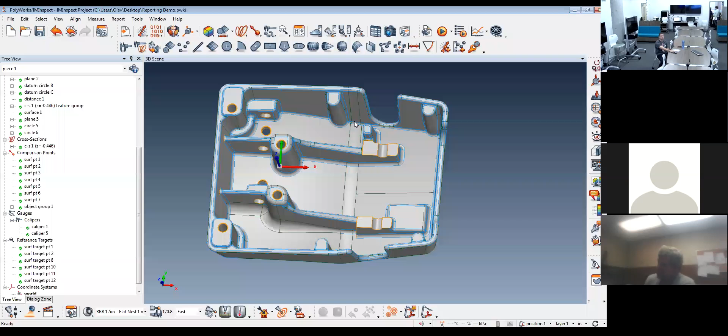Metrology. Today we're going to be going over how to report things in IMInspect. This basic part here is a casting that we have scanned in. I brought in my CAD model, and I have some data here from scanning. This is kind of a general inspection for casting.

I'm going to go through how to report it for casting purposes, like as if you're going to set it up for machining, and then as well as we'll go through some datum reference frame measurements. So generally the first thing you're going to do is you're going to bring your scan and get aligned, and you're going to create all these features.

So I have here, I created a color map on it. I'm going to turn on my color map. Usually with a color map you'll have some annotations in here showing some of the bad spots on the part that you want to highlight. So the first thing in reporting a color map is I'm going to have the CAD model turned on and the color map activated, and all of the annotation points that I want on this particular part turned on here.

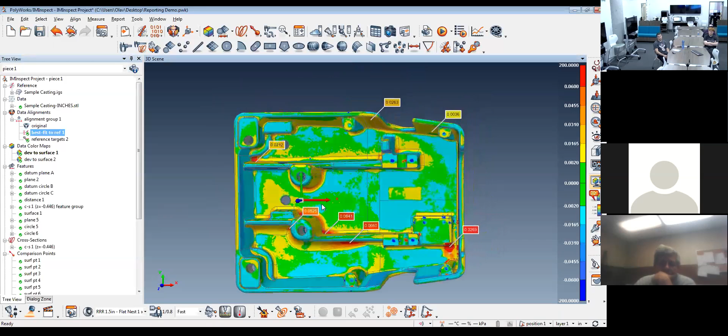And one thing that I'll go through and do with color map inspections is using the Cardinal views. I'll go through and align this part here, and I can go to this icon here, it's the Capture 3D Scene icon. If I hit that button, what it'll do is it'll add a snapshot to my tree view in the bottom left.

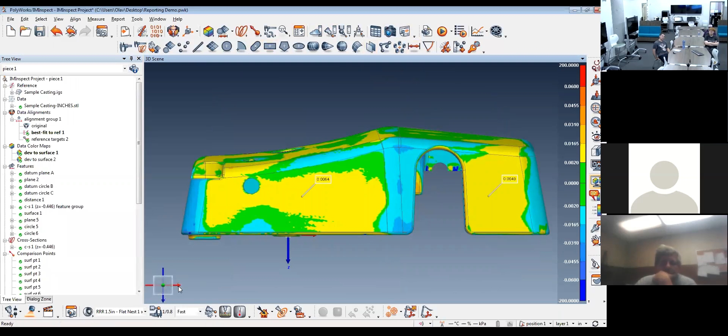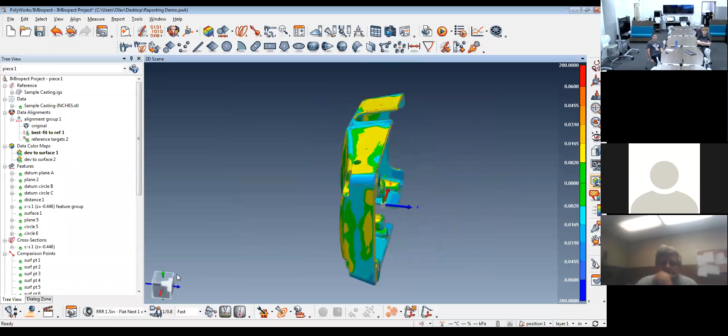So what I typically do is I'll go through each one of the different axes, and I'll create a snapshot for each one of these. That way you can see exactly where all the deviations are. So I'll go through and do that. And with some parts, it's also helpful to have some of these isometric views inside of there. It allows you to see better inside of different areas of the part where you wouldn't normally be able to see from the direct Cardinal views.

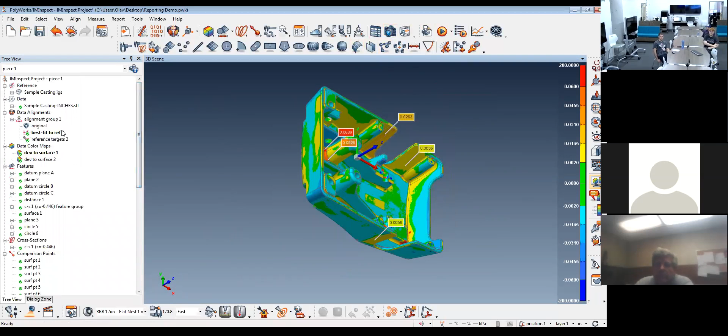So now I have all these snapshots I've added in right down here. If you'll notice, I'm in my best fit to reference alignment. This is just kind of a best fit to see where you have material. So now that I have my snapshots created, I can go ahead and select these guys right down here. If I right click on them, I can go to Create Auto Formatted Report.

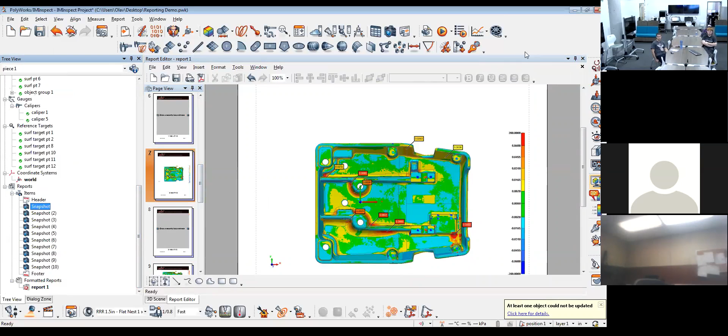What this will do is it'll automatically create a report based on the template that you have installed. For us, we have an Exact Metrology template that we've created, and it just adds those on to the last pages right there and inserts them in and kind of fits them. I usually find that these work best having 2 per page. You can do 1 per page, such as like this here in our template. We just could drop this in, but it doesn't really add that much in size. So it can automatically create a report that way.

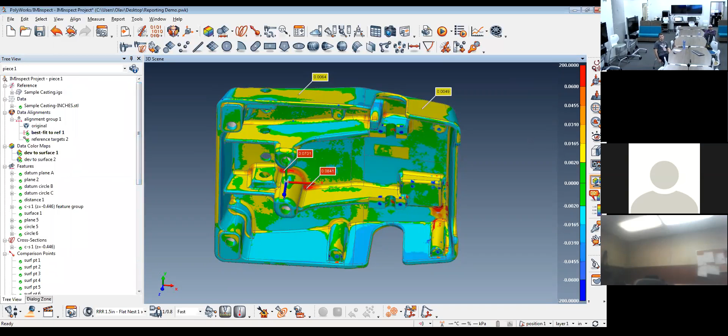Next thing I'm going to do, go back to my 3D scene here. Now that I have my color map images started, if I turn off my color map here, I'm going to go ahead and turn on my cross section right here. If I turn my color map back on, I can add in cross-section snapshots of this as well.

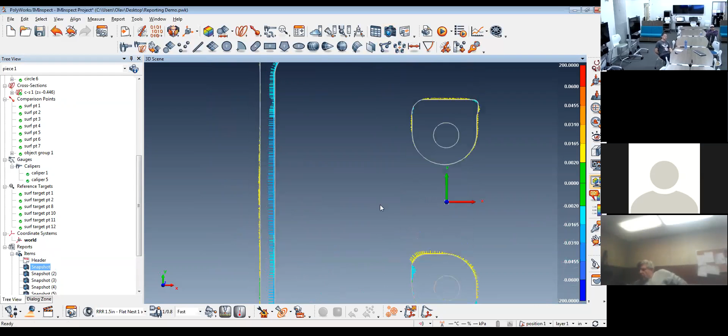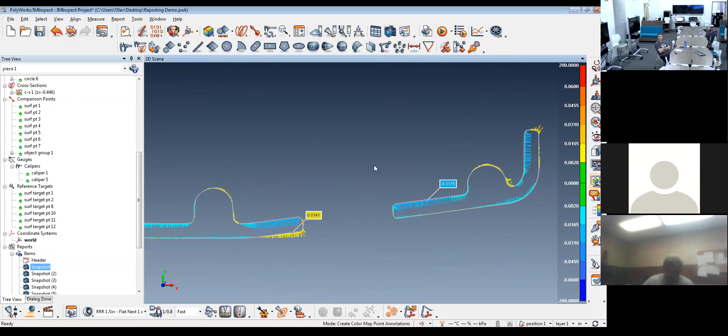Now with cross-sections, I can do the same kind of things that we did before. I can create annotations just by simply clicking on a particular spot on the data or on the CAD, and it'll tell me what that number is, and I can create a snapshot by simply pressing this button here. Now if I turn on my CAD model, I have all these snapshots created for these color maps.

Okay, the next thing I'm going to do is change my alignment here to my reference targets alignment. Now, one thing you'll notice is if I go to the properties of these snapshots, its alignment is set to the active alignment, which means whenever I change my alignment from the best fit to the reference target points alignment, it'll change with it. Now, on this particular part, I don't want that.

So what I'm going to do is I can select all of these snapshots. I can go to their properties, and I can tell it to stick to the best fit to reference alignment. And so now, regardless of what alignment I have active here, it will always stick to that best fit to reference alignment.

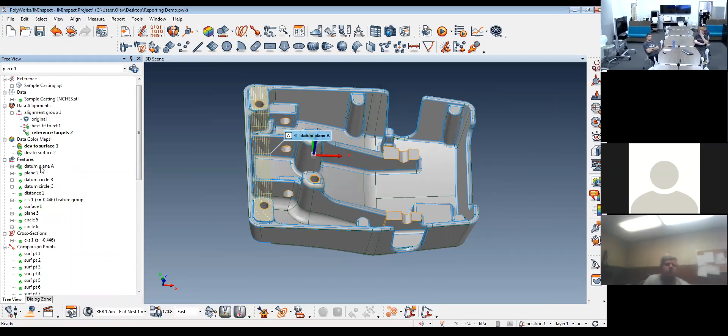So with a part like this, I've created the datum A plane, which is across here. Datum circle B is sitting right here, and datum circle C is sitting right there. And on the print, the casting locators for the machining process are here.

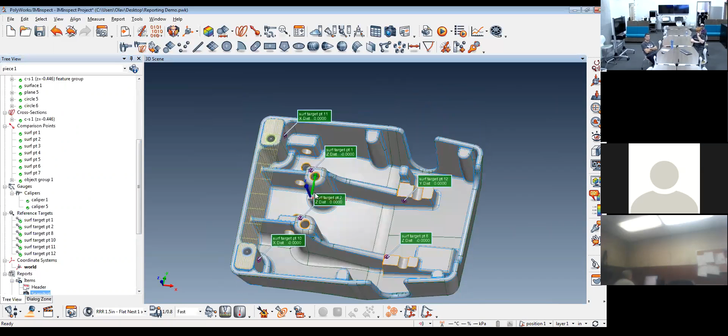Okay, so next what I can do is select these two features, and I can report their positions in the reference targets alignment so that based on the machining fixture, we know where these are sitting. To do that, I simply select the two of them, and I go down here to report.

These are all different templates for a table. So if I just hit table, it'll create a table based on the default template. This right here is the table it created. If I double click on that and open it up, you can see here, this is just the basic table template you're going to have.

You have the ability to have a header on the table. It'll list the units, the coordinate system, the data alignments. Most of the time, I don't find these terribly helpful. So what I can do is I can right click on it. I can edit it and change it to whatever I want it to be. Or I can just remove it altogether.

These here, I can turn these on or off just by right-clicking and turning them off, and I can add other ones as well. Any one of these or these guys. Generally, though, I turn all of these off. Usually, if it's the first table in a report, I'll leave the units just so that way there's no confusion.

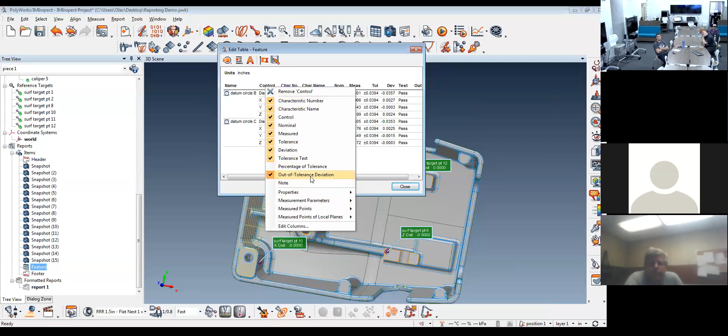Inside of the table here, you have several different columns. You can edit these columns. You can change the order of them however you want. If you right click on these guys, you can see there's other columns you can add in. There gets to be quite a few of these guys. If you go through them all, I'm going to turn off the out-of-tolerance deviation. And I'm going to turn off characteristic number and characteristic name.

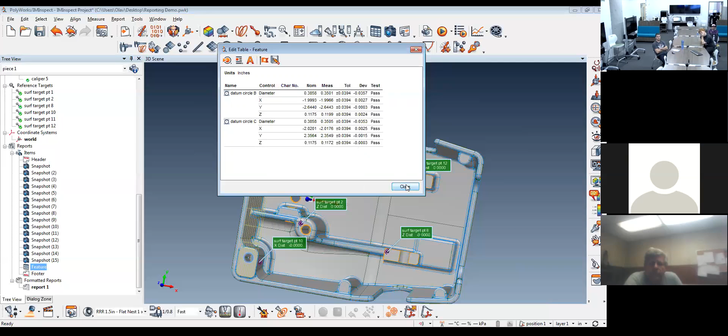Let me show you something. The one that I do find very helpful typically when you're ballooning a print is characteristic number. What that's referring to is if I select datum circle B and I go to my geometry controls here, there's this icon right here, hide and show controls.

Let's say on this print, when I'm ballooning it, it called out that diameter as the very first call out. I'm going to give that a balloon of 1. I can give this one 2, 3, 4. That way it's easy to identify which call out that is.

When I go to my table, it's going to give that characteristic number, which makes it a lot easier for ballooning, especially if one of these features has more than one characteristic. In those cases, what I usually do is I'll remove the name. That way I can just go by the characteristic number. Let's type in some numbers for these guys. Now if I go back down to my table, you can see the characteristic numbers. And then I can just drag that over, so that's the very first thing you'll see.

I can set these controls by templates. By clicking on the letter A here, I can change the format of the table, such as the font that it uses, the size of the font, the number of decimal places. You can change it so that it will color the cells based on whether it's passing or failing the tolerance. And then down here I can set this as default, hit OK, and that's now the default template.

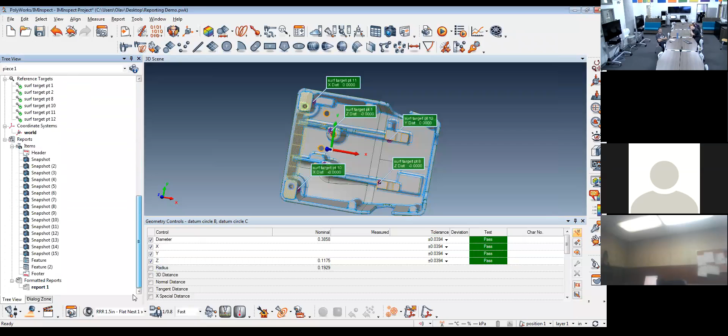I can set this as default. I can give it a name. And now you'll see here we have default 1 in the list. That simply makes it easier so that next time if I make features and I want to report them the same way, I can simply right click on them, go to report, and go to default 1. And now the table that it creates here is automatically in that same format. I can delete that table just by right clicking and hitting delete.

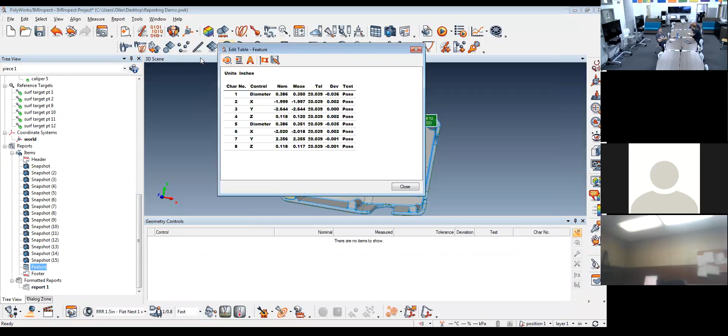Now, one thing to notice is that when you double click on this, there are no settings for which alignment this falls in. So if I was to go and change my alignment from the reference targets to the best fit, those values would change.

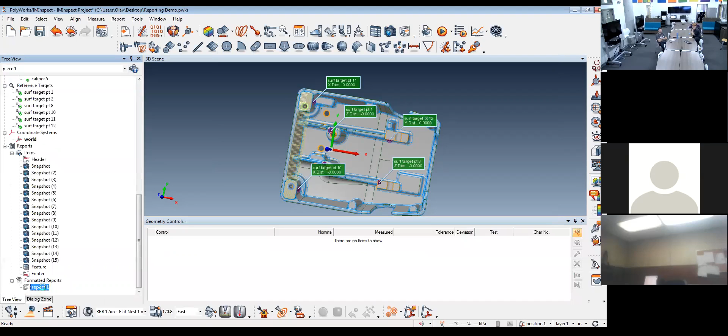The way to change that is to go ahead and right click on the table, go to properties, and inside of here, this is where you can change the alignment that this uses. So by changing this to reference targets alignment, hitting apply and close, I can then add this to my report. Give the computer a second to catch up.

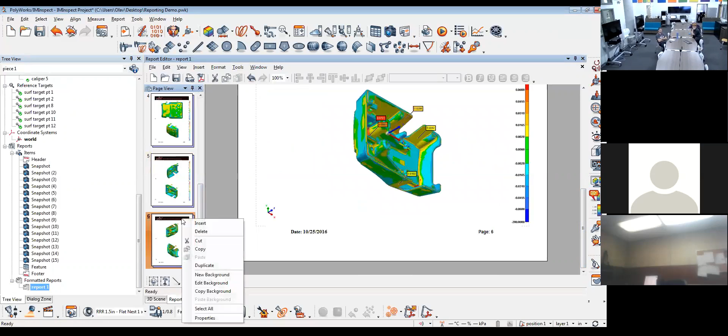Okay, I'm going to go ahead and delete these pages that I don't need just by selecting them and hitting delete. It'll remove the pages. So the next thing I can do is if I select this page right here, hit insert, it'll add a page right at the end here. I can click and drag that table onto this page. All right, save, it'll update everything.

And now I'm actually reporting the color map in the best fit alignment and at the same time reporting these values in the target reference alignment. This is how you would be able to report in multiple alignments. And the same thing goes if I was to create a second table, which I'm going to go ahead and do now.

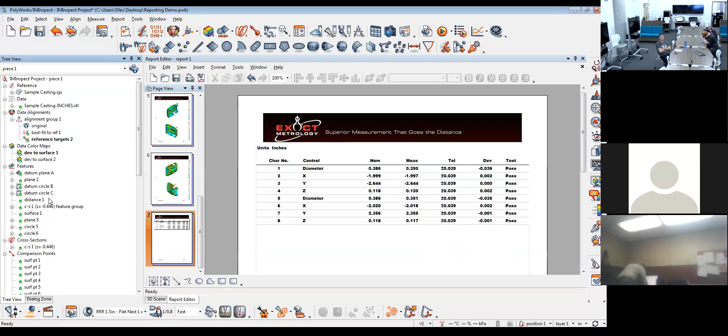So what's happening here is because we're currently using the reference targets alignment, that's what the X, Y, and Z values are going to be reported under. These are the active alignment. A true position value is going to be calculated based on the datum reference frame of A, B, and C. In order for these values to calculate and equal what this is measuring out at, I have to create that A, B, C alignment. So I'm going to go to my Alignments tab.

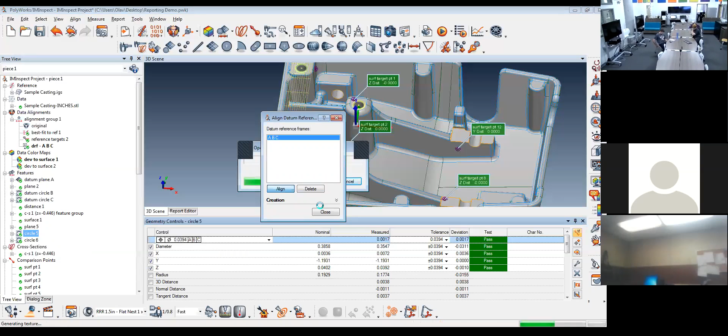At the very bottom here, I'm going to go to the datum reference frame alignment. Inside of here, I can select the alignment that's being used in this true position callout and hit align. The computer will calculate all these values and it's going to move the part. So now you can see how we have 8 tenths, 2 tenths. That's going to make sense for this guy right here.

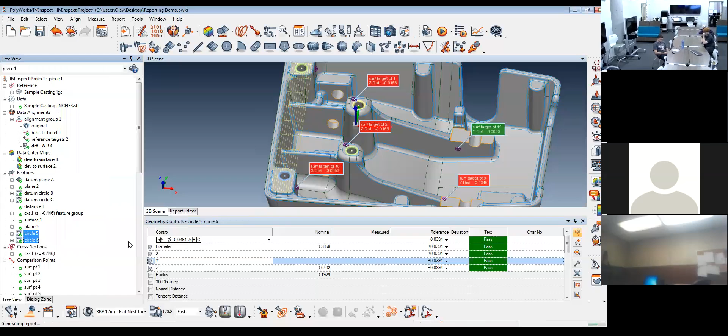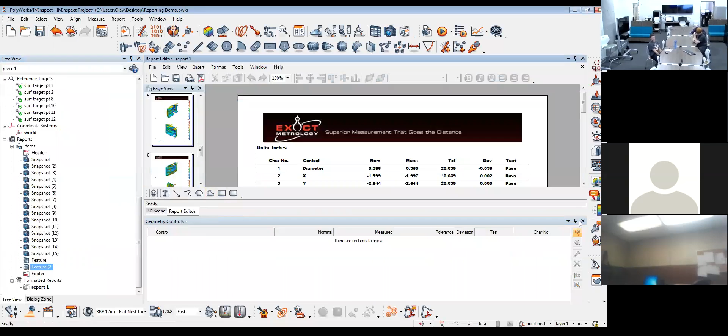Okay, so now when I report these two, I can go here, report, and again, I can just select the default that I had created that works for my reporting, and it'll create that table. I now have this second table down here. Now these values are being measured to the datum reference frame. Okay, so now I can go back to my report. And I can drag this table in.

Now again, since my first table already is showing the units, I'm going to right click on this guy, double click on it, and I can go in here and I'm going to remove the length units. Okay. And now these values are all going to make sense. Okay.

Now I can also go in here and just like I was showing before, this one's the reference targets alignment. I can go in here and add the alignments listed that way. I know, for example, this table at the top is using the reference targets alignment. This one's using the datum reference frame ABC. Okay.

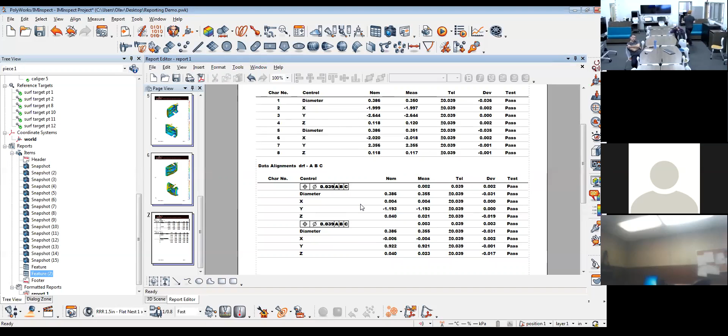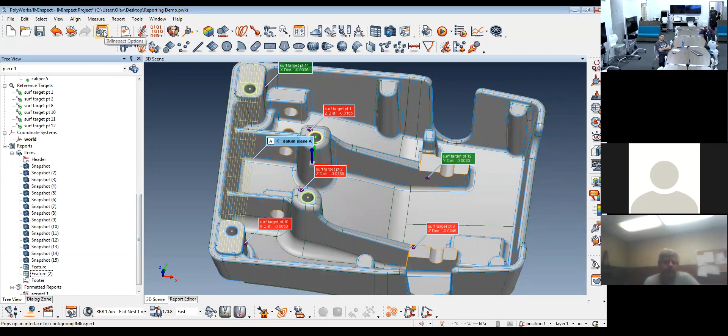Now, one thing to note on this is that some of you may notice that over here, these are showing up in the tree view. PolyWorks has two different ways of creating its report items. If I go to the IMInspect Options page, and I go to Objects, drop that down and go into here, Reports. This very first option here for Tree View, this is where it's going to create and put those items. Right now in the Tree View, whenever I create an object, like a snapshot or a table or a feature table, it just drops it right into my Tree View.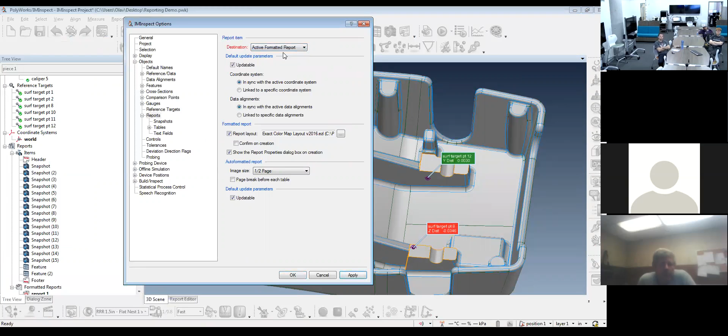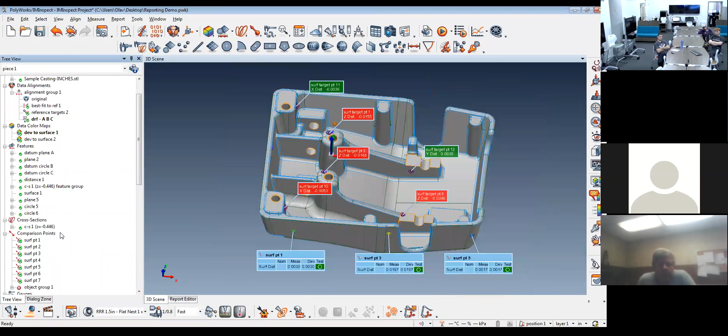If I go here and change it to Active Formatted Report, it's going to bypass the Tree View altogether and put it directly into the report. So, for example, I have some comparison points that I've added in here. Okay. And I want to see where those are. Turn off my... Okay, so I want a table listing the locations of these guys, how far off they are and such.

So if I select these and I right click, I'm going to go to report, I'm going to go to table. It did not add a table in here. If I open up my report, it automatically dropped it right into the report here. Okay.

The one downside of this is when you get into non-repeatable report features, it can be a bit cumbersome to edit them and bring them back in. As an example, one thing that I can do on this part, let's see, I'm going to turn off my comparison points, turn on my color map.

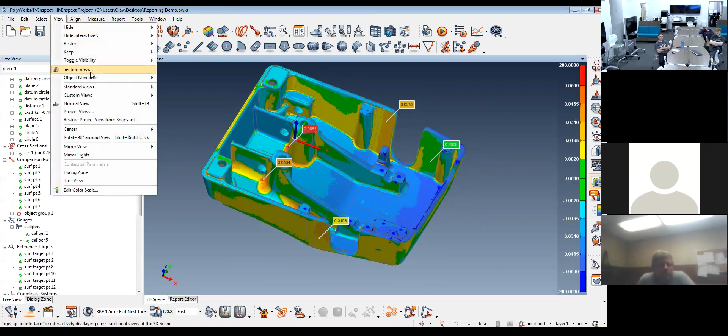One thing that I'll do with, for example, castings that have some kind of core: measure the outside, then you cut it in half and measure the inside, stitch the two together, and you want to know where that core is. One way to see that core is through a section view. If I cut a section of this part like this, and I'm looking at it like that, getting a color map to the inside of it where you wouldn't normally be able to see without any other type of view, and I create a snapshot of that.

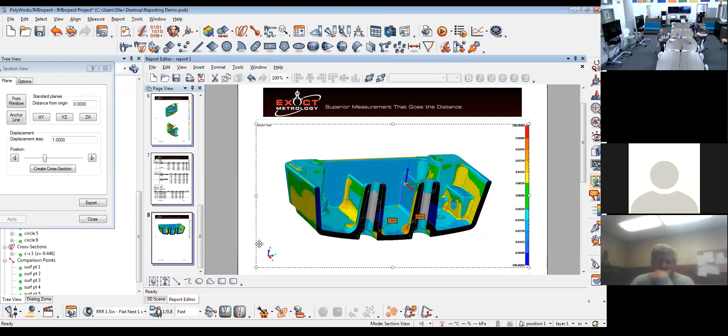I go to my report. This is not going to repeat on the next part. Section views are non-repeatable. Rather than seeing a section here, you're just going to see the entire part. So that's one area where it's nice to have features in tree view. Let me show you what it would look like if it was in the tree view.

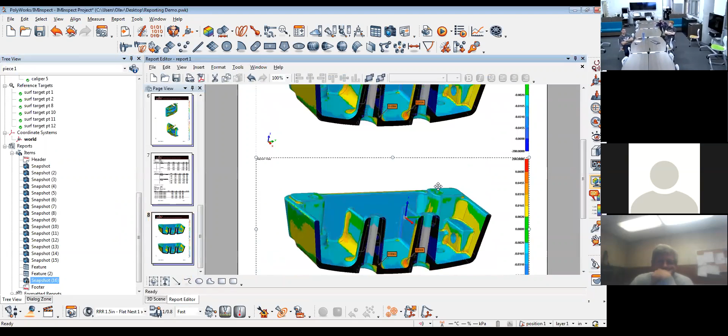It gives this guy right here a little anchor. Okay, so then if I drag this guy in here, on the next part, the snapshot would not have the cross section. I can just come in here and right click on it and go to edit, and I can go to restore project view. And then I can just go to my section view and then create that snapshot again.

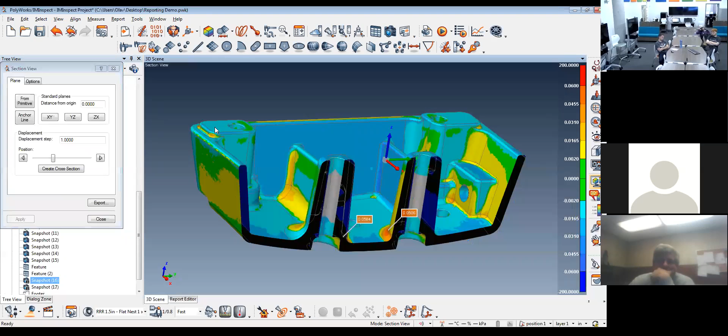That's one area where I find it a lot easier to have the objects in the tree view rather than a report. But it's mostly personal preference more than anything else.

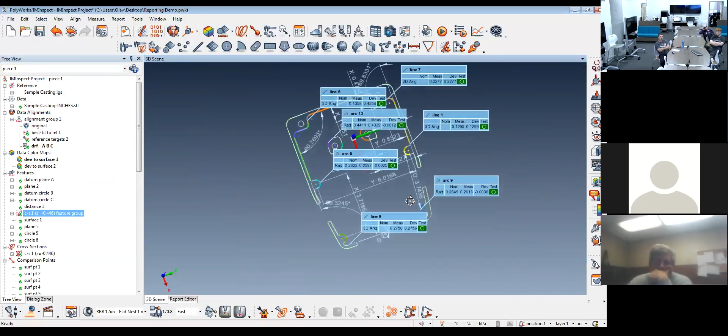Another thing that I've done on this part, I'm going to go over, is I've created cross-section features. So if I turn on my cross-section, turn off my CAD model here, see I have a bunch of dimensions I've created here. PolyWorks has the capability of doing cross-section dimensioning. It really does look pretty slick because it looks kind of like the dimensions on the print.

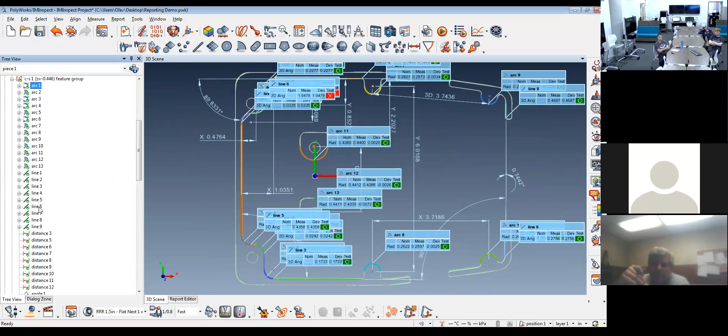Now, one thing I'm going to do is take this as a snapshot, but I'm not going to want all of these windows right here. These are the annotations that are kind of obnoxious for this kind of reporting. So what I can do is select all of these guys in here, go to properties and just uncheck the annotation button, hit apply and close, and now my annotations are gone and all I see is the dimensions themselves.

So in order to move these guys around, if I hold down the Alt key and click and drag, I can just move these to where I want, to where they make sense. That way there's no overlap or anything like that.

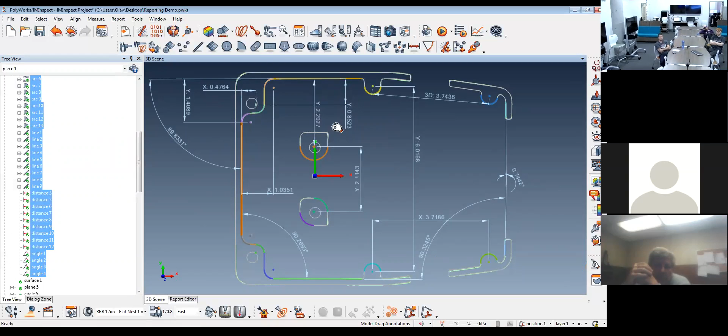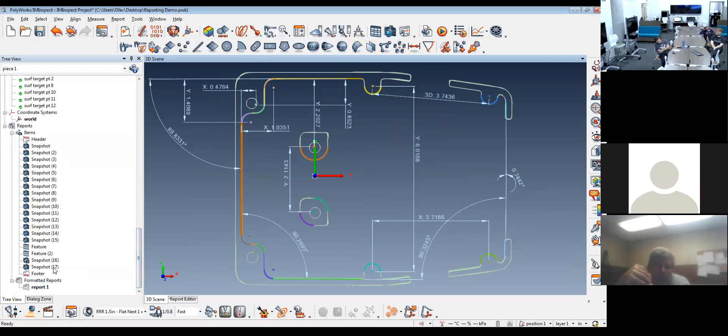Okay, now that I have the dimensions where I think I want them, I can just go ahead and hit Capture 3D Scene. It'll put a snapshot in the tree view for me. And I'm going to go down here, get rid of this guy, and put this snapshot right in my report like that.

Now, since I have 3 different alignments in here, anytime I create a snapshot or a table, I need to make sure that I go in and set, oops, if I double click, it'll open it up in Windows. I need to make sure I go into properties and change the data alignment to the alignment that I want it to stay to.

Okay, with these anchored snapshots, like the section view here, it will not allow you to set the active alignment because it's a non-updatable item. It's simply a one-time thing. So whichever alignment you had active at the time that it was taken is the one that it will stay on. This feature table here, I need to change this to datum reference frame.

Okay. And then the comparison point table is going to be to the datum reference frame. I'm going to right click and I can go to edit table. And I'm going to go ahead and remove the units, coordinate systems, and linked objects. Okay.

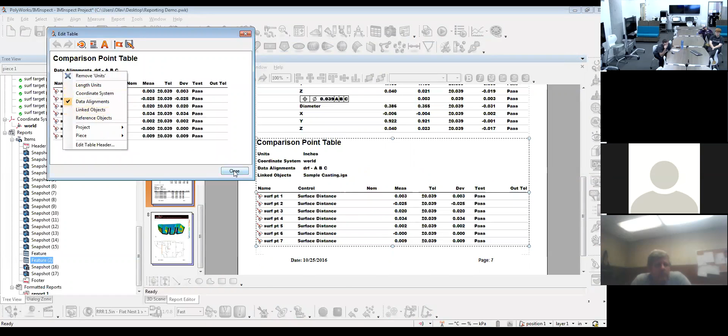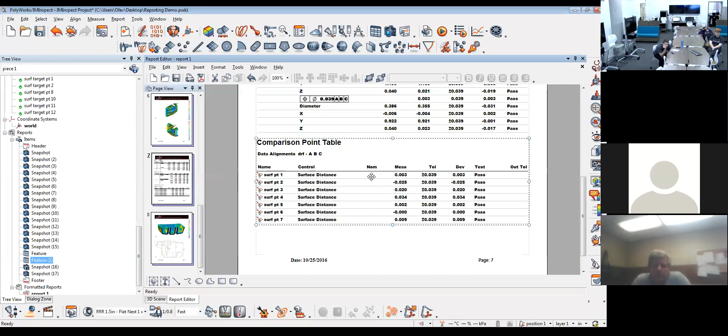With comparison points, you'll notice there's no nominal value. That's because the nominal is assumed to be 0. So if you see anything where that's missing, for example, there's no nominal for true positions in most GD&T because it's assumed to be 0 is nominal. So those will never fill in.

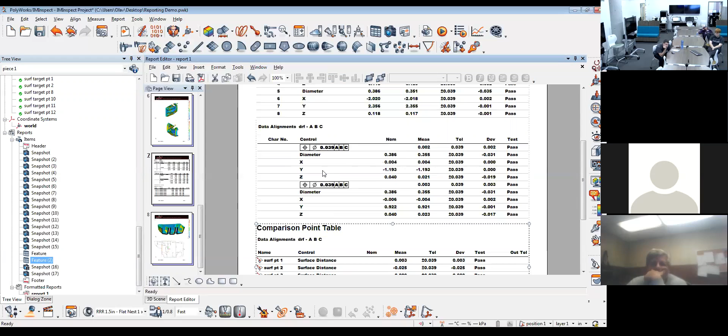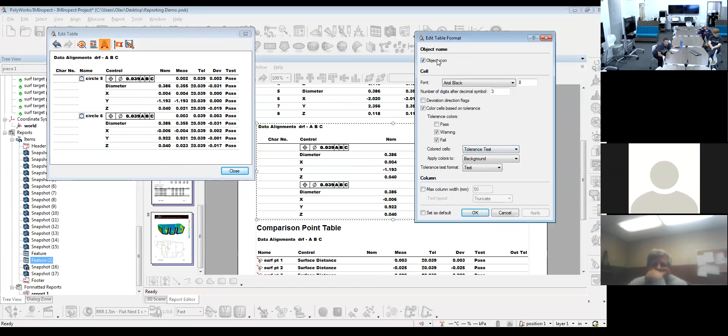Let's see, so inside of this guy, if I double click on this and I add the name back in there, you'll notice it has this circle right here. If I go in here, there's object icon. If I turn that off, it won't show what that icon is or what that feature is. So it can be kind of nice to have that in there. That way you know exactly what kind of feature was being used, irrelevant of the name.

A lot of times what you'll see is a feature will be named, for example, this circle. You'll give it a name like item 1 on inspection report. Well, that doesn't necessarily tell you what kind of feature it is, which makes it nice when it comes to these tables to have that icon in there. That way you know what kind of feature it was that was used to measure that particular dimension. So now even though it's named item 1 instead of circle 1, you still know what type of feature it is.

Same thing goes for here. The icons for the surface points are going to be the same icon that you would get right here for that feature. Now you'll notice in here the tolerances are coming up default in these tables. If I go to my geometry controls right inside of here for whichever feature I have selected. So for example, I'm going to go to my datum circle B.

Right now I have these guys being reported out. I can change those tolerances by simply going in here and selecting a default tolerance for it. So for this guy, I'm going to set this at 5 thousandths. Okay. Once I save this, let me save this together. You can see here, it's changed that tolerance to 5 thousandths.

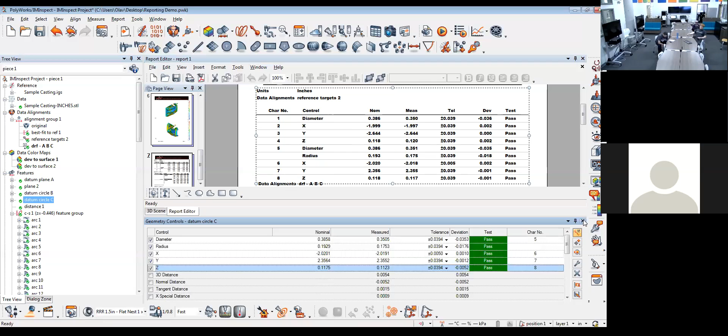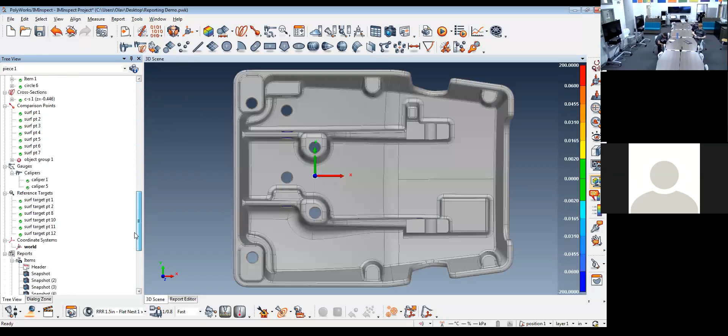So next I have created a second color map in here. And this is kind of a fun one here. I have a surface on this part. Let's turn this on here. I have this surface I created right here, and they're calling for a profile of the surface.

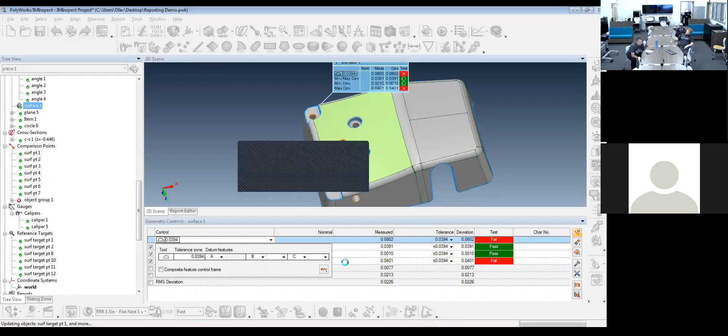So what I've done is I created that surface feature there, and I can go in here and add a GD&T surface profile of this guy. Tell it what my datum reference frame is, simply putting it exactly as the print would show it. The computer will calculate out what the value is. Okay, and now I can see what the minimum and maximum deviation is, the surface profile value that it came out with.

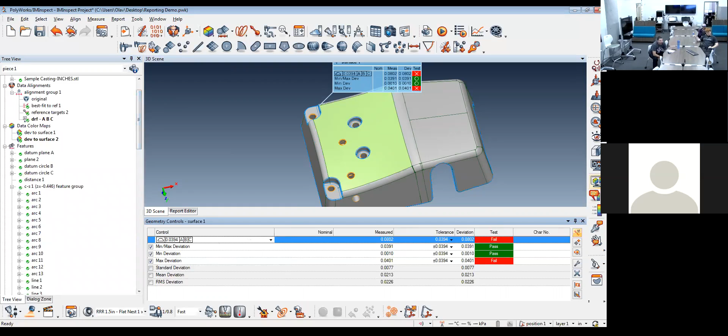And something else I can do, it's really nice to help kind of see where those errors are, is I have created a color map of its deviation. Okay, so now I can go in and actually show, based on this profile, where those errors are.

Now with this color map, again, since I'm using a datum reference frame of A, B, and C to measure that profile value, when I go and take the snapshot of this deviation map, I need to make sure that my alignment is the datum reference frame that's being used to calculate that surface profile. So I have the DRF ABC activated. I can go ahead and hit capture the 3D scene, go back to my report.

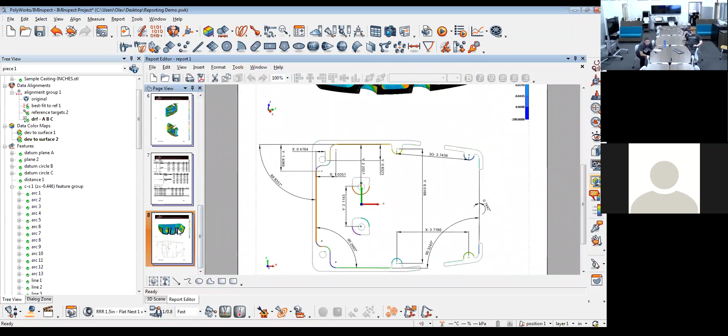I can go ahead and I can insert page. Go down to my last snapshot I took right here. And I can just drag and drop this right into here. Okay. So those are the primary functions or tools that you have for inputting data into a report, is snapshots as well as feature tables. You can do tables on just about anything on here that you want.

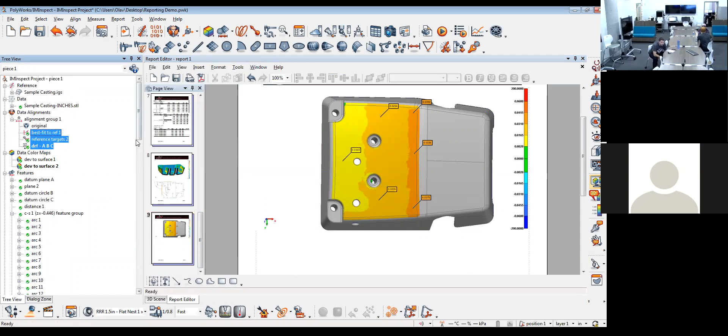You can even do, for example, you can report your alignment table. Okay, it'll kind of show a comparison of the different alignments. And what it'll do is bring this in here like this. It'll give you all the values for that. So the Euler angles, the translations, all the parameters for that.

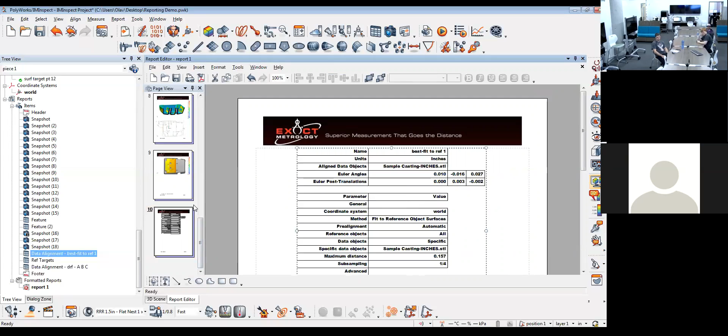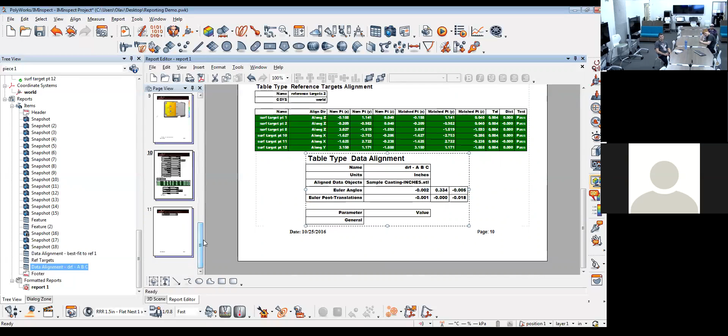Okay, so then I can go ahead and bring in this guy. It'll show you all the translations for that one. And then I can bring in the datum reference frames alignment. That way, if someone wanted to know all of these values, which I haven't had, but you can sometimes have that, it is all there, it's available.

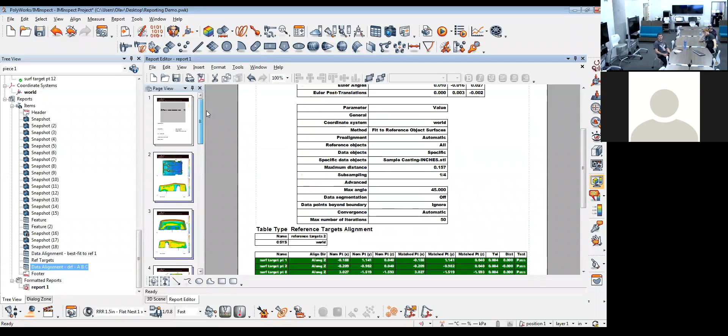So the next thing I'm going to show you is how to actually change some of this formatting. As you can see, for example, our default template we've created has my information on it so that the customer can get a hold of me. But you can change all of this for your particular use. So I'm going to go over that now.

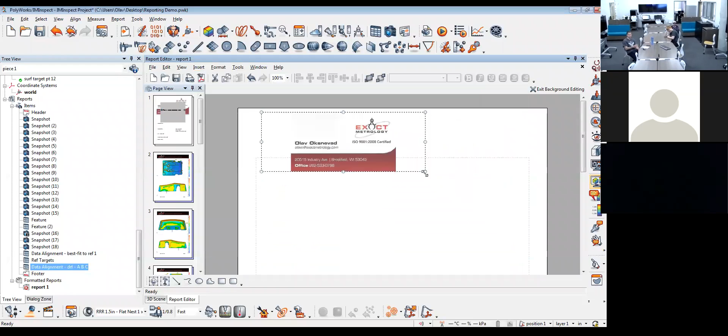First off, the header here, we can change this. Just right click, go to edit background, and you can grab this guy and move it, delete it, and you can bring in, for example, your own another image. Let's see, for example, I can bring in, whoa, that came in a lot bigger than I thought it would. I can bring in my business card, put that right there.

Okay. If I wanted to say insert a text field in here, I can right click and go to create. And I can insert, there's two different types. I can bring in a fixed text field, which is where I can type whatever I want in. Right like that. I can create a variable text field, which will change every single time.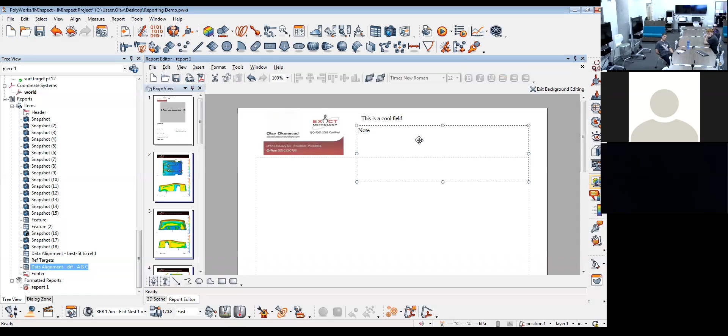So a variable text field will be blank every time I create a new report, and you'll just have to type it in. So a good use for this would be for notes, for example. That way, when I create a new one, there's a blank field, and the operator can just type in, you know, hey, this part really did not look right and didn't fit on the fixture, whatever. It'll be blank every time. I don't use those terribly often, but they are available for you.

I can go in here and I can create all kinds of cool lines and stuff like that if you want to. So for example, on this part, if I really wanted to emphasize, let me flip it around, that hey, that spot on the part's really, really bad, we need to do some work on it, I can do that. I can add in all kinds of different things inside of here.

For example, text fields, if I go to the item creation options, the alignment for the text where default comes in, I can change that right there. I can change what the default text is. So, for example, right now it's Times New Roman. I can change all of that kind of stuff right there so that the default is changed. For tables, you can set a max column width. Honestly, I've never had to do that, but you can if you want to. You can also change the word wrapping.

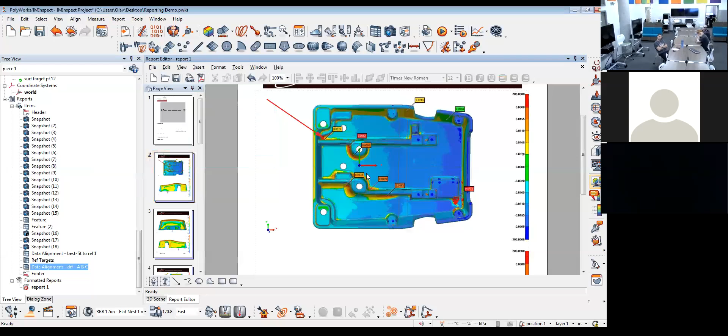So another nice thing to have here is the options for changing these things. These will automatically populate. With a lot of ISO and AS9100 and other such formats out there, there's control of the actual document itself and its editing. That's done from inside of report properties. So for example, inside of your quality manual, you would have a document name or number, and you can put it in there, and then the last person who authored it, you can put your name in there.

You can add in some custom fields. So for example, I could do whatever I wanted to enter, and then I could enter those values in here. Okay. I'm going to hit apply. And right here, let's see all of this.

So we have prepared for, these are custom values that will appear on the inside of here once you fill those in. So for example, I can come in here and right click, and I can go to insert, and I can go to report properties, and I can put in like the ISO cert. And when I click outside of here, it's going to automatically put the value in that I typed in there for that.

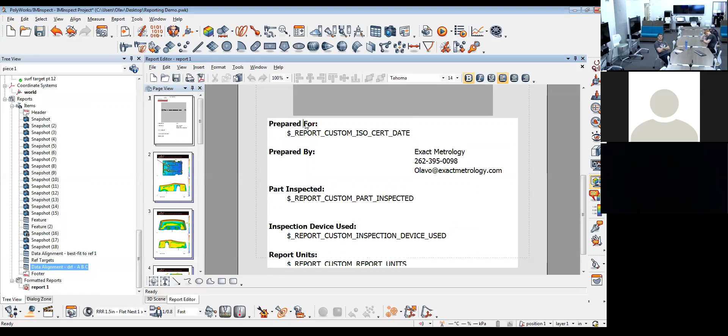Okay. Some of these values, like part inspected, can also be automatically filled in. Rather than going through to the report properties page, it's better to go through here to the project property page. And since this part number is not necessarily going to change for this workspace or for this IMinspect project, a better thing to do would be to put in the part number in the actual project properties.

You can put in the part name. All kinds of information. I can put in here, for example, the rev level. Okay, so I'm going to put that as rev A. Then for each piece I can put in all kinds of information here. For example, if my part is serialized, I can put in a serial number for it. I can put in an order number for it. I can put in the name of the operator that ran the part, and I can put in the name of the device or a serial number of the device that was used.

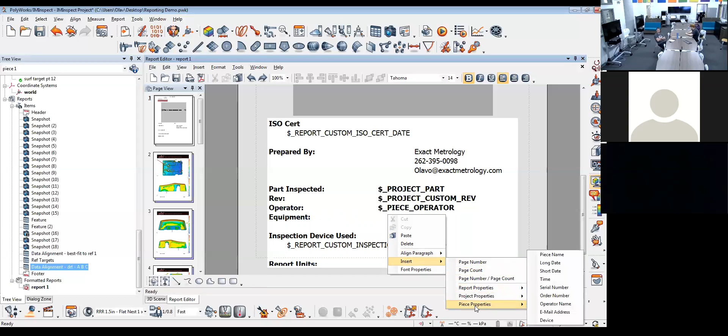Then I can do operator, insert, and now instead of project properties, I go to piece properties, and I can add in the operator name. Again, this could be piece specific, so I can go down here and just add in device. Okay, and now it's automatically going to fill in all of those values for the particular part.

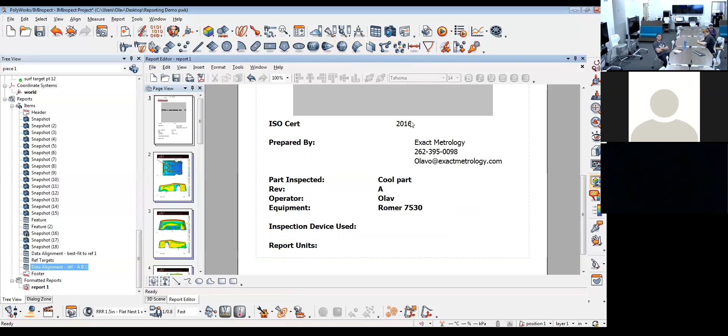Part inspected will not change within this IMinspect project. Rev level won't change. The operator name will change. Whenever you go to do a second piece, it'll prompt you for who is the operator, what equipment is he using, stuff like that, and it'll update for each piece. These values, as long as you have this template saved, are not going to change. So let's say this is how I want all of my reports to look, where I have color maps, report tables, feature tables, and my cross-section view.

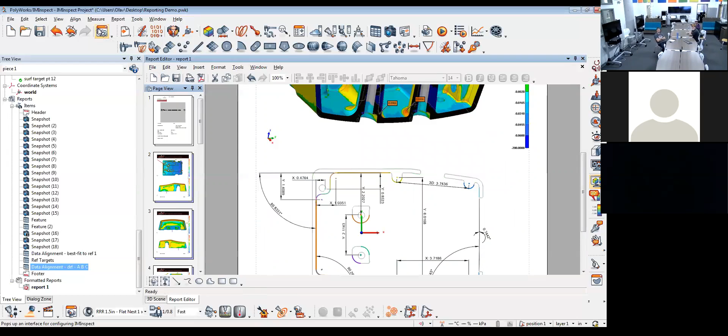If I like the way this looks, I can come in here and go to Save as Layout. I'm going to name this layout some name to remember it by. Save. And now when I create a new report, it's going to automatically use whatever the default is. There isn't really a way to easily open up that layout you created and create a report from there. The best way is to go up to the IMinspect options page. Again, under objects and under reports, you can go to the formatted report layout, go to desktop and open default.ezl.

Now, one thing to note is if I wanted to save these to a different location, what I usually do is go to the desktop or wherever I saved it, cut these, and go to the actual place where Polyworks stores the report layouts. That way I don't have to keep it on my desktop. Go to the report folder, layout, and I'm just going to save it in there. That way it's with all of the default ones that Polyworks comes with.

Okay, and then I just go to my computer, program files, layout, and I can select that default. Now that I have that selected, if I create a new one, it'll automatically pop up with the report template that I had created, and I can fill in all the values that I need, right like that. Okay.

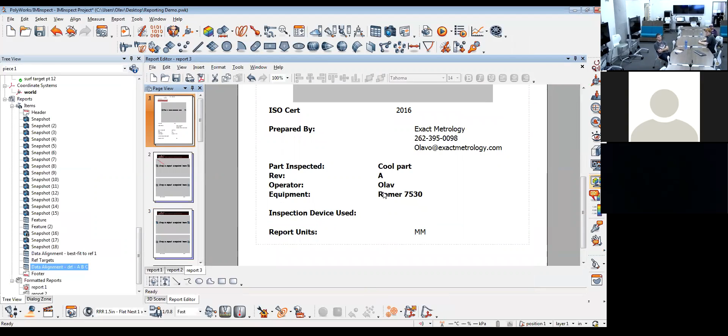So, and again, it'll automatically fill all that in based on the input I put in. Now you'll notice on the second page, because when I saved it, it had snapshots here, it's automatically going to create this window where you need to drag a snapshot. Okay. So that'll allow me to put these in right like that.

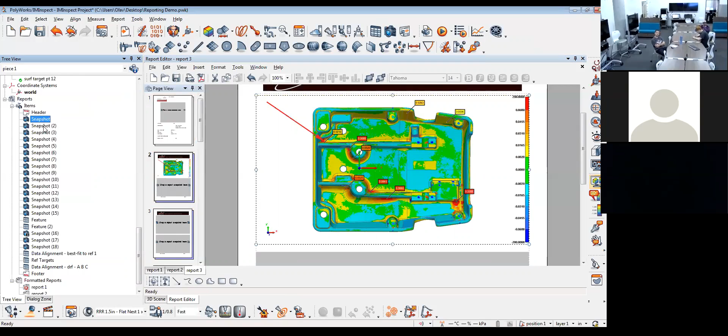Okay. Now, that being said, when I go to create a second piece, if I had this snapshot in this window right here, it's automatically going to recalculate and refresh this image to what the current part is. So when I go to do my second piece, I don't have to continuously drag these in. Once it's created, it's automatically going to go. Using these would only apply when you're completely reprogramming a different part. You can automatically have this as the layout. Okay.

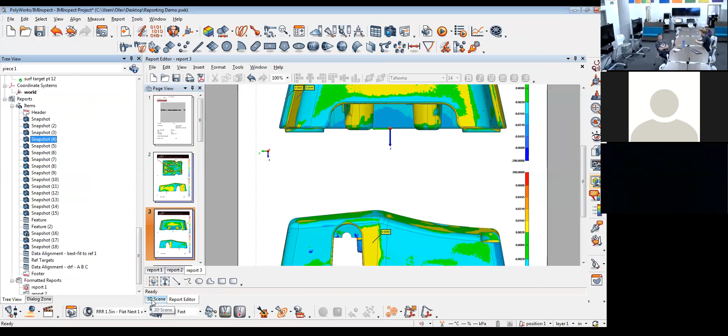So one thing to show you as well, there are different features that you can measure with. So for example, we have planes, we have circles, lines, all kinds of stuff up here. Let's say that I wanted to literally know where everything in my program is going to be, and I just select all of it, and I right click and I go to report, it's automatically going to create a whole bunch of different reports, or a whole bunch of different tables.

You'll have your feature table. This is going to be all your geometric features of lines, circles, planes, points, anything like that. It'll create a report for the cross section to tell you what your line profile is, your deviations, and all of that. It'll create a table for your comparison points. There it goes. Show you where all of those are at.

One other thing that it'll create is a table for calipers if you're using calipers. This will actually be separate from your geometric features tables. So if you create a table with everything and you're looking through your feature table trying to find your calipers, they're not going to be in there. They're in a completely separate table here. Okay.

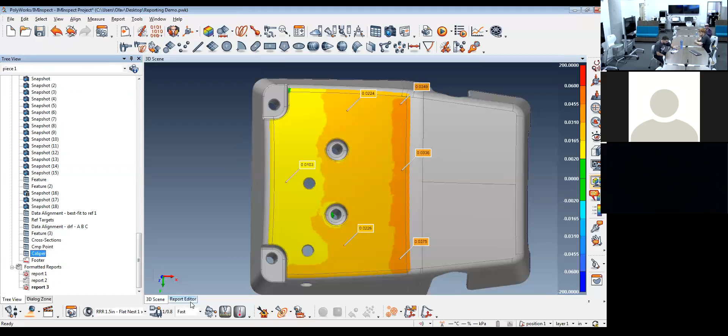Now, as nice as this type of reporting is inside of PolyWorks, it is fairly limited because once it's been exported as a PDF, it's just images that have been saved inside of a PDF, which doesn't allow you to select text or anything like that, which can be kind of cumbersome when it comes to transposing values onto another format.

So what they also have for capability is you can right click on the table and you can export this to Microsoft Office. So for example, if I export to Microsoft Office, I'm going to go to Excel, one page, it's automatically going to export these into columns and into rows so that I can transpose those into whatever other report fields I want. I don't know if it's sharing that, if you can see all of it. Okay, so it'll be in Excel there.

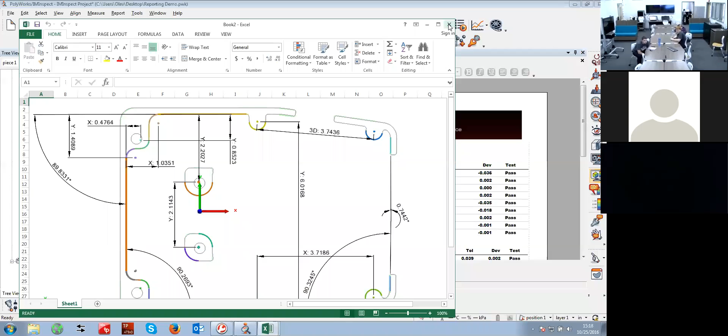If I right click on snapshots here, I can export this to Microsoft Office as well. And what it'll do is it'll put in a second Microsoft Office window here. If I select a whole bunch of things at once, it'll put them all in, but it's going to create a separate sheet for each one of these items if I select one item per page.

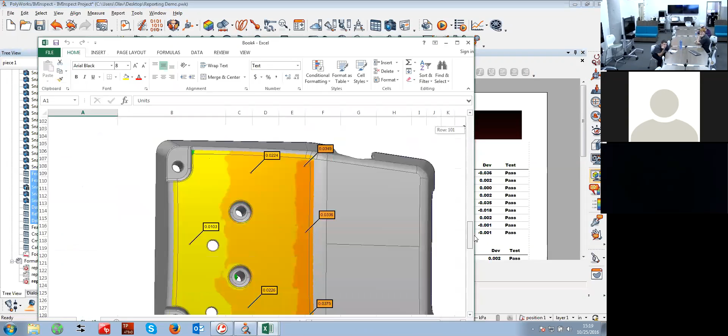Now, if I right click on these and I export them to one page, what it's going to do is just stack one on top of the other on the same page like that. So the best way to get that out of a PDF instead is to just export these features that way. The reports can be exported as HTML, images, or PDF. That's the best way to do it. If you have to be able to copy the actual values out, you're going to need to export to Microsoft through this way right here.